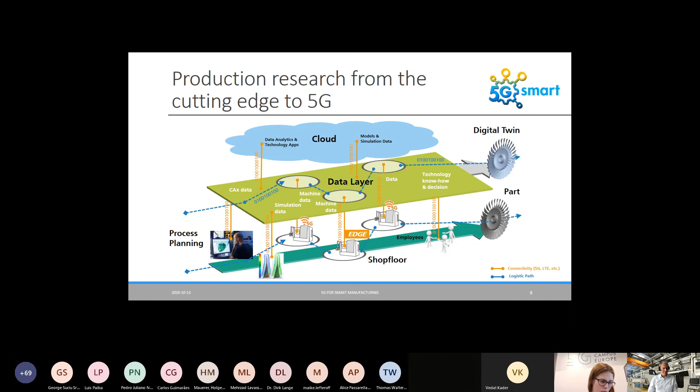So, of course, 5G is attractive because of its unique properties. We know all about these properties already from the many presentations from the press. Of course, we talk about different scenarios. We talk about enhanced mobile broadband communication with high data rates. We talk about ultra reliable and low latency communication with very low latencies and very high reliability. And we talk about massive machine type communication, where you have a high number of devices or high device density.

So with respect to manufacturing, it looks like the most attractive KPI here is ultra reliable and low latency communication, because 5G then outperforms other wireless technologies, especially in terms of reliability, while having also low latency. This is actually the game changer, while 5G is attractive here in manufacturing.

So some example in order to underline the necessity for 5G in manufacturing. This is actually showing results from a study we carried out within the International Center for Networked, Adaptive Production. So we made a factory model, a 3D factory model, where we asked companies from the OT domain how to fill up a shop floor of 10,000 square meter with a number of machines that they envisioned, also partly from their background, very much focusing on machining.

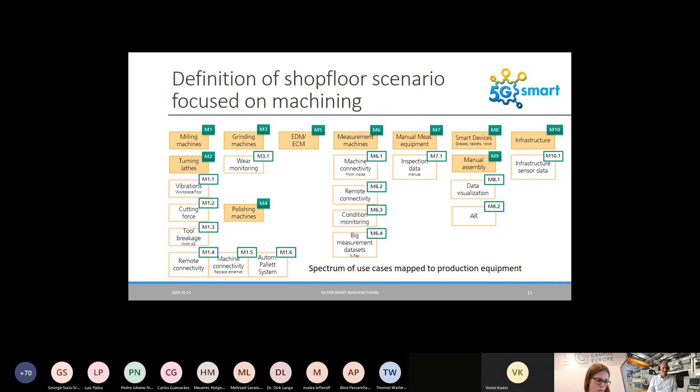For example, vibration monitoring, cutting force monitoring, tool breakage, and so on. Of course, it's clear that all of these use cases cannot be established today because there is no market offer yet. But in case if these devices may be available in future, it's quite interesting to see what is the data profile of this complete production environment enhanced with 5G. That's why we did this kind of mapping.

And this is just one example which kind of use cases are assigned, for example, to milling. You see here milling machine, 5-axis milling machine, and we have an assignment of different 5G use cases, for example, wireless vibration sensors, wireless tool breakage sensors, and so on. And then we have a number of how many of these use cases are actually positioned on the shop floor. So I have to add that in total, this 10,000 square meter shop floor is equipped with more than 90 machine tools. And of course, many of these machine tools, so the companies found it very attractive to have them very well equipped with different kinds of sensors.

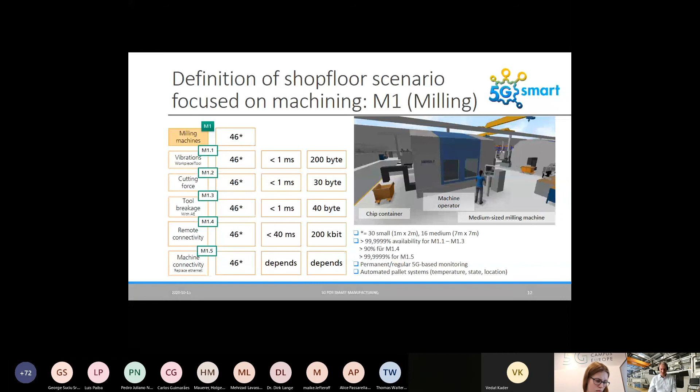And then we had some requirements towards which latency requirements they envisioned. So is it a critical parameter that is being measured here or less critical? And what is the estimation about the packet size, which is being transferred per cycle? And of course, what's the reliability requirement here?

And then we had the overall estimation, and also we could do the positioning of these use cases on the shop floor. In total, more than 900 devices assigned to this shop floor. Here you can only see the use cases that are critical for latency, where we set the latency requirement below 10 milliseconds. From this more than 900 devices, more than 200 were latency critical, which is a bit characteristic for machining, I would say.

And with this data, we can also create different kinds of heat maps. For example, the total number of devices per square, if you want use case density or device density, but we can also calculate the data rates per rectangle and so on.

And this kind of data is, of course, then interesting for the radio planning. What I'd like to state here is that the total data rate coming from these more than 200 5G devices, the many sensors and so on, was more than 600 megabits per second. So assuming that all of these devices are transmitting at the same time, and considering that we have this data rate of more than 600 megabits per second and more than 200 devices begging for latency, it was becoming quite clear that there is a requirement for 5G, because no other wireless technology could fulfill this requirement.

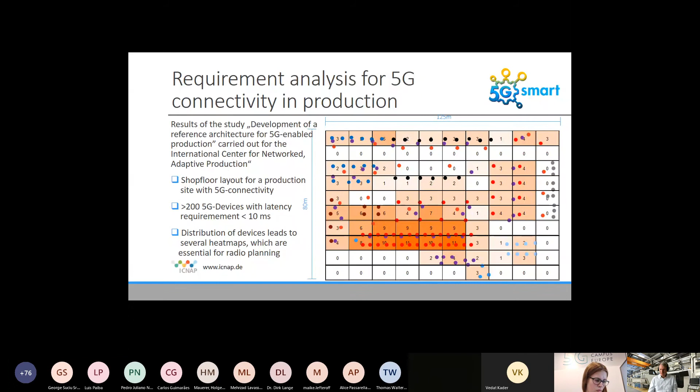Okay, so that was the first presentation, let's say a motivation for the necessity of 5G in manufacturing.

So now I'd like to present the 5G Industry Campus Europe as an innovation platform for the European manufacturing industry. So what is the 5G Industry Campus Europe? It's a very large 5G research infrastructure, a large industrial 5G testbed that we set up here in Aachen.

So the 5G Industry Campus Europe consists of multiple different shop floors. And the shop floors are fully equipped with many machines, machine tools like milling machines, turning machines, and so on, but also robots, and also equipped with logistics equipment like storage, AGVs, and so on. And furthermore, there is an outdoor network of 1 square kilometer that actually surrounds the buildings that contain the shop floors.

And this is set up as a 5G non-standalone architecture. And we have this so-called industry spectrum, 3.7 to 3.8 gigahertz, and we are operating this network in this frequency spectrum. So the national regulator has granted the license for the spectrum here on the campus. This is the campus Melaten of the University of Aachen. And as this is a non-standalone architecture, we also have a 4G network as an anchor band running at 2.3 gigahertz.

So now I'd like to show you a video about a project. Hopefully it's not too loud for you.

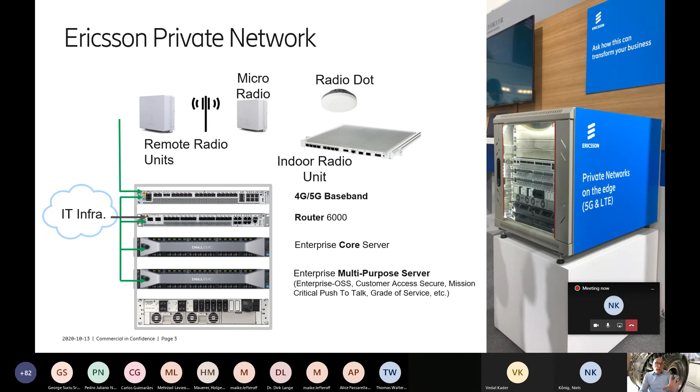The mid band, you probably recall from the LTE days, typically in the 2.6 gigahertz area, 2 times 20 megahertz FDD spectrum has been allocated and is used by most of the operators here, for example, in Germany. 5G is a lot about new spectrum, meaning that the existing spectrum, low band or mid band, could be partly utilized for also 5G NR. But in addition to that, we see quite a bit of new spectrum coming up.

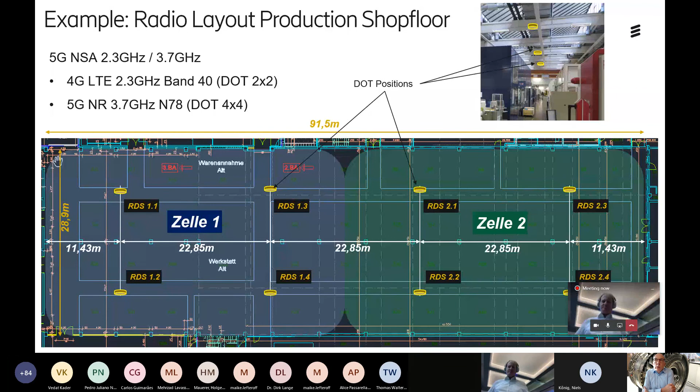It also allows all the indoor users to roam into the outside network. Still, the data then falls out of the network element on their indoor installation. And of course it can visit the neighboring indoor shop floors if wanted. We started with 4 indoor shop floors, done in a way that it can be easily expanded to cover additional indoor networks.

That's what I planned to present: a quick glimpse into how such a shop floor deployment could look like, what we have done so far, why we have done it, and what we have considered in setting this up.

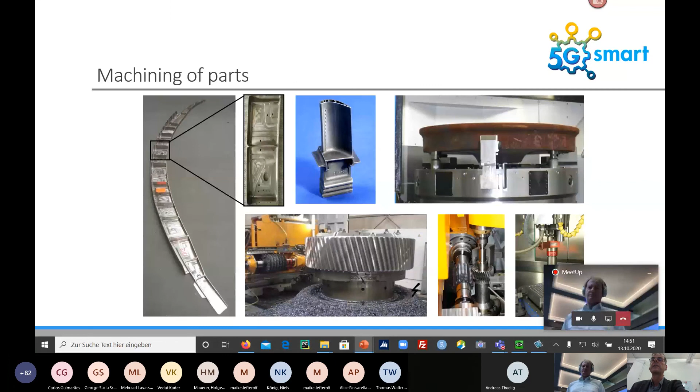One approach, besides other sensors, is to use acoustic emission sensors, a very sensitive quantity. The principle is here on the left hand.

You can see the cutting edge, which could be a grinding wheel, a milling tool, or a turning cutting edge, whatever. If metal material is cut, you get a kind of chip breakage. The chip is cut out of the material, and this produces very high frequency noises. The frequency range can go from the lower kilohertz range up to multiple megahertz, 4 or 5 megahertz, depending on the process, material, machine, damping and filtering. So we have a forming process producing these acoustic emissions.

These acoustic emission waves then run through the material, the workpiece clamping, or the machine table, and then there's a state-of-the-art acquisition using piezo quartz or piezo ceramic to capture this data. Then you have these structural vibrations. You can see here some example signals. It's sometimes very noisy, and it's a challenge to get the right information out of these signals.

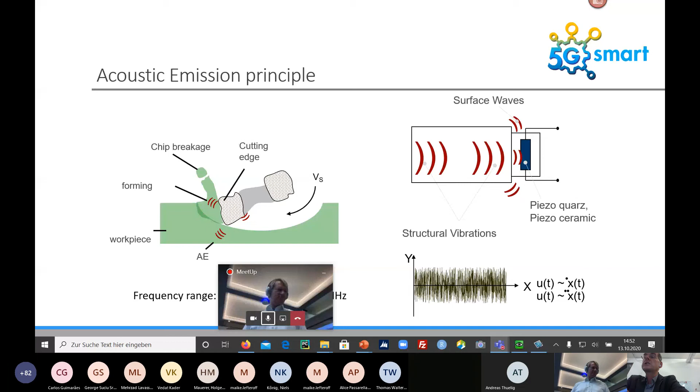The principle is shown here on the left hand: a kind of acoustic emission sensor. The principle is very easy, it's a piezo element. You can find these elements in greeting cards that play music, same principle, just used vice versa.

You have a damping mass, and every wave coming from the cutting process, over the surface, goes through the membrane, through a coupling element, into this piezo. This creates signal changes, loaded with a load amplifier, giving you a very highly sensitive signal. There are different kinds of sensors, for example on the top side, sensors which are mounted by screws.

Other, you have some small inductive coupling, but you can see here the disadvantage because the distance between the sensor element and the emitter or transmitter or receiver is only a few millimeters.

So there is often a need or a problem to install or integrate these sensors. For example, here on the right hand, you can see some grinding applications where the signal flow could be through the grinding wheel, through all the bearings and on the spindle head.

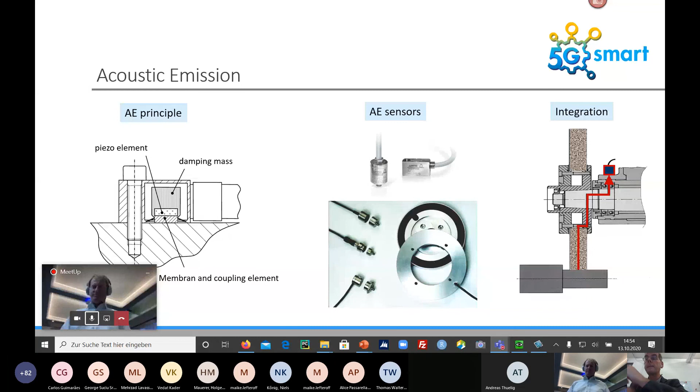And that can cause a lot of problems because you have damping, you have noise from the bearings. So that is only one of a couple of examples why we want to develop some 5G acoustic emission sensors, meaning we have wireless monitoring.

One other application is tool breakage. We have data rates up to 20 gigabit per second if we do not have any pre-calculations, so we produce a very high amount of data. But in this project, it's also a challenge to find or have an idea what is needed for the pre-amplification and pre-calculation.

This can be used, for example, to detect in cost-intensive parts or critical parts like turbine blades or blisks, finding some deviation during the cutting.

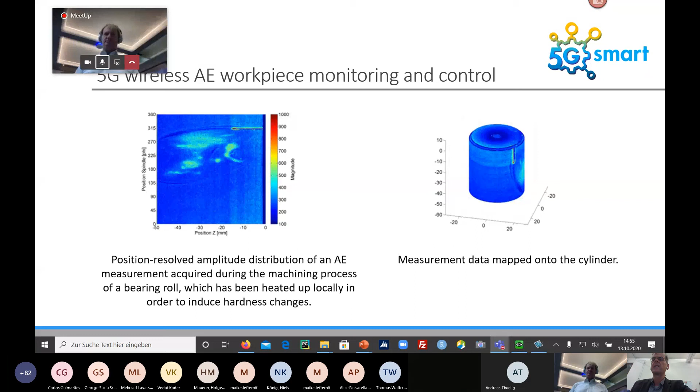So when we look at the use cases, we have, for example, tool breakage detection in metal cutting processes. That means we want to monitor, for example, very small tools in the sub-millimeter range. And if we look at PCB production, there we sometimes have 100 or less than 100 microns diameter.

We have multi-spindle applications, material contact, gap control and grinding. That means we can run at fast speed to the workpiece and then stop when we detect the contact, collision monitoring, or crack detection during grinding.

It also produces some high frequency signals. So as you can see, there is a high need, and it's also a challenge because these acoustic emission sensor signals are very high frequency, including...

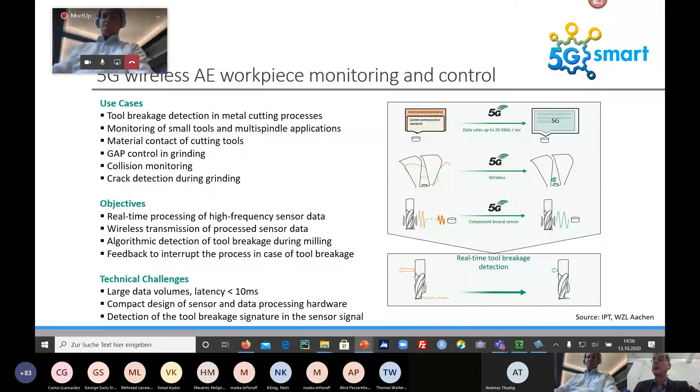What is a typical chain? When we look back, acoustic emission is known for 30 years, and there is a standard measurement chain. We have the high-pass filter, an amplifier, then we cut the upper range and the lower range, and in the end we have some RMS collected, converted with the analog-digital converter, and then provided to Ethernet. This was done in the project.

We used an AE sensor board, developed and connected it as a prototype to the FPGA board, where we are more flexible to find some more algorithms, better filtering, faster filtering.

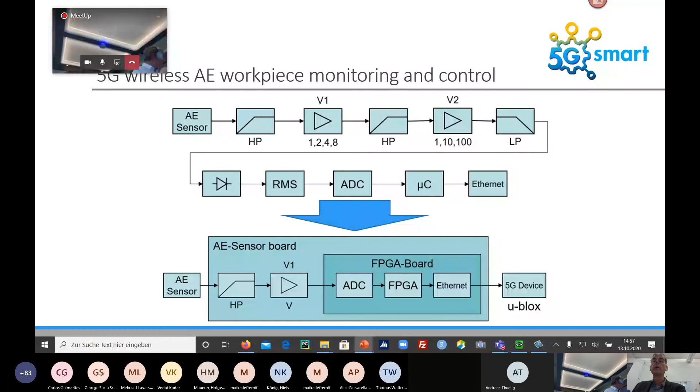So in the project, we connect the AE sensor to the sensor preconditioning module. In the end, it's a complete hardware module with a high-speed analog-digital converter up to megahertz, and we have an FPGA or signal processor.

We have some connectivity interface to get or write out the signals. For sure, we also need some onboard memory.

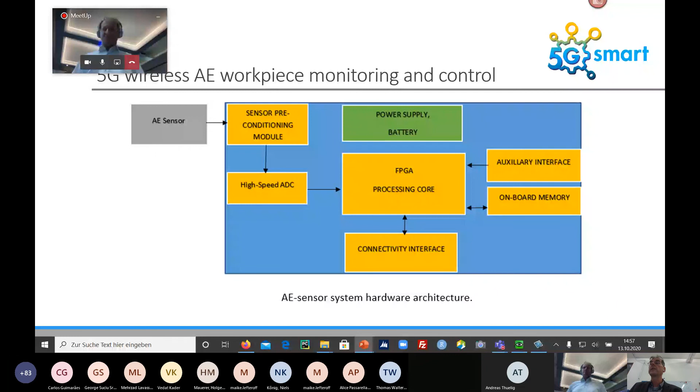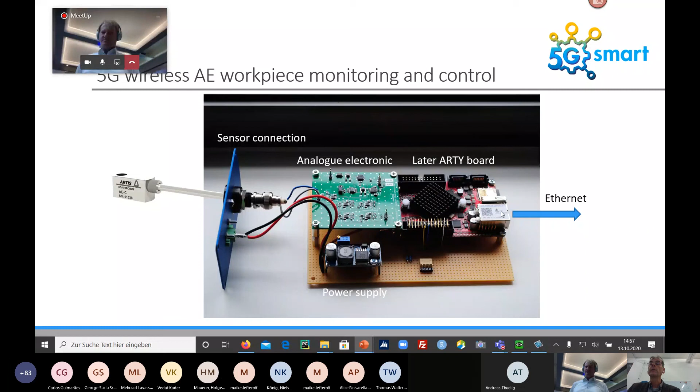So that looks a little bit big, but every big thing starts with a little bit bigger development. We have here on the left hand the acoustic emission sensor, an analog board, and the FPGA board, and we write out the data to the Ethernet.

And in the end, we want to close this loop, using this sensor device as a prototype inside the machine and sending out the measurement data stream. We can configure the data, or configure via data, that is not at such high data rates. For example, we can change the filter, the sampling rates, and run some fast Fourier transformations.

So I think that is a combination, also a bit of the structure for the machine: not only the AE sensor module, we transmit the data to the station of the 5G core, we can have data processing in the cloud, maybe a parallel analysis of the data, and then we want to send back the data via a monitoring unit to the machine where we need the real time.

So we have then later a closed loop if needed via the 5G interface. The other thing is we can save the data within a database or an edge device.

So I think now we can hand over to Niels for your practical demonstration, or?

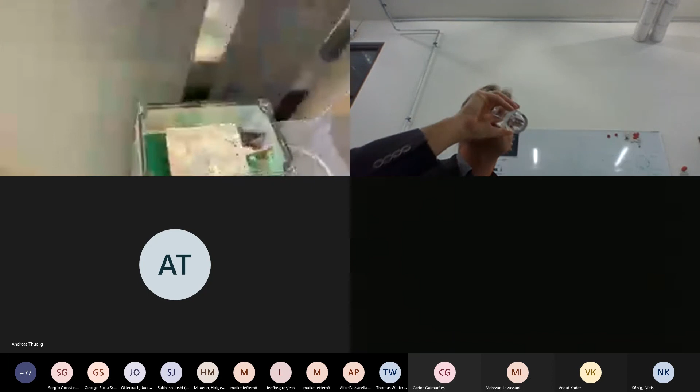Okay, so we have the demonstrator that Dirk was explaining. We have this electronics that you have seen in the photograph, here's a little bit more compact version. So we have some pre-amplification and signal conditioning PCB, and then there is an FPGA board.

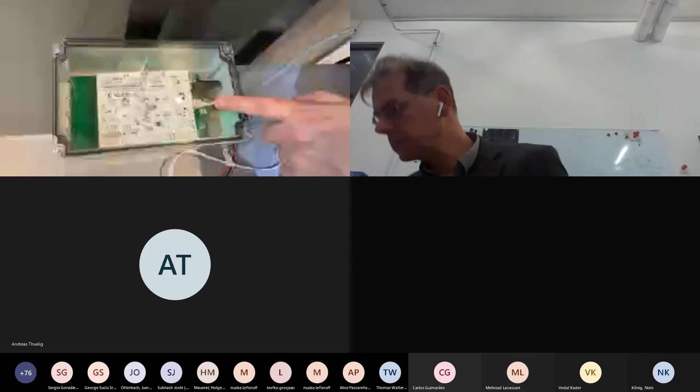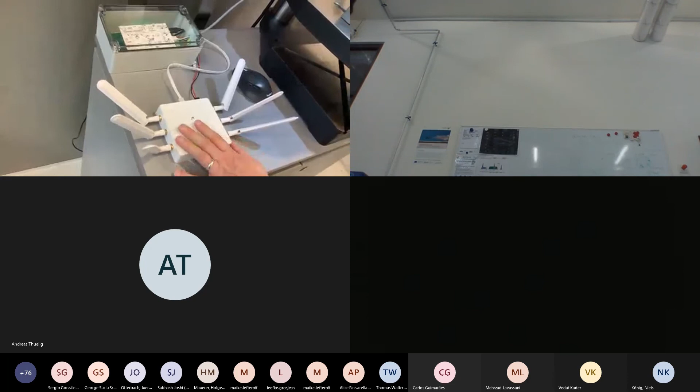The FPGA board then generates the signal spectra. So there's an FFT calculation running at this 1 megahertz signal. And then we have the transmission via Ethernet into an industrial 5G gateway. So from here on, the signal is being transmitted via 5G, of course, then handed into the intranet, so on the shop floor LAN.

And coming back via Ethernet, so there's some cable coming back here, and there's some industrial PC inside this box. This PC is showing actually the result of the signals we are creating here. So here's the piezo sensor attached to the sensor electronics.

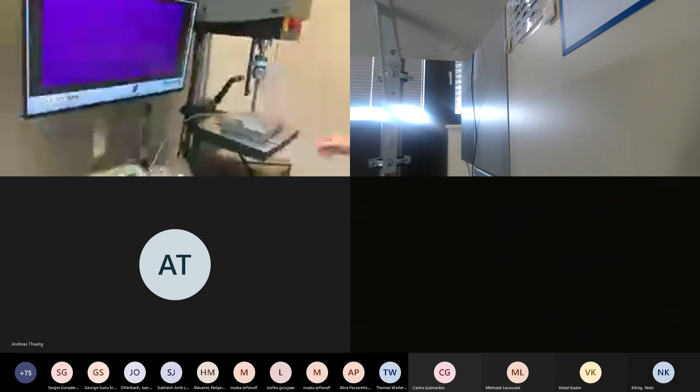And now if we create, now it seems to be... okay. Seems not to work, unfortunately. Okay, I'm sorry. Okay, it worked. It worked an hour ago, actually. So what I would have shown you, it's just a software problem.

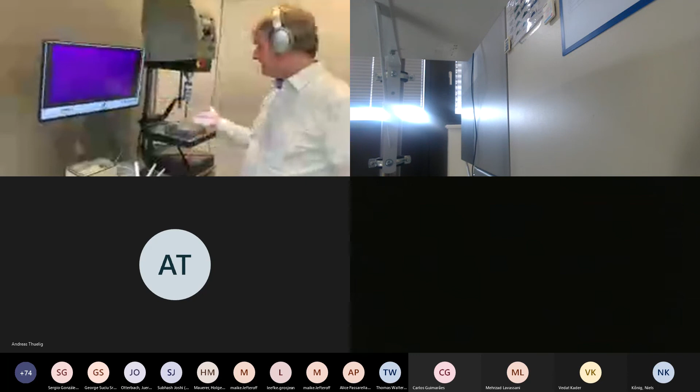Shown you is a waterfall plot where we have on the x-axis time, and then on the y-axis spectra. And you can actually see how the cutting edge carves into the metal and scratches the metal. On the one hand, you can hear it with your ears; on the other hand, of course, we create data coming from this process.

In our case, as soon as a certain amplitude is exceeded, then it interrupts the voltage, just for the sake of the demonstration. That's just an example of how to react to these kinds of critical process conditions. If you wonder about the background noise, that's because we are actually on the shop floor, and all the machines and colleagues are working here.

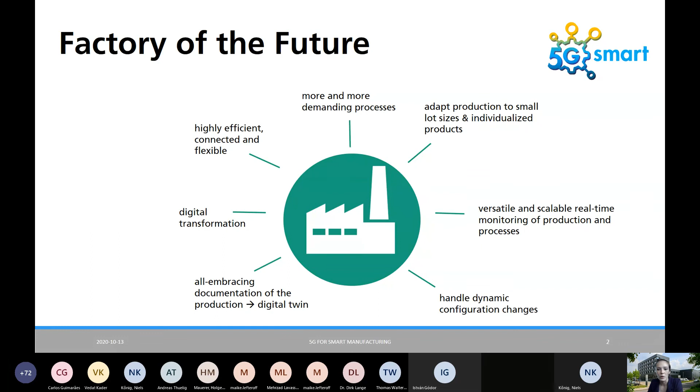And if we want to create something like a digital twin, we need an all-embracing, complete documentation of the production. So all this can only be reached if we go into a digital transformation for industry. That means we need highly efficient, connected, and flexible factories of the future, so a perfect match between sensors, communication, and computation modules.

There are already solutions and technologies in the industrial world that try to make this vision reality, but all of them still have weak points and bottlenecks. For example, many connections are still wired, mostly Ethernet and field bus protocols, and they have limited flexibility, sometimes are even impractical to deploy and have a high cost of deployment.

We also have wireless solutions like WirelessHART, but they need to be more flexible and especially more sensor diverse. Standards like Wi-Fi and Bluetooth don't meet reliability requirements, especially in connection with reproducible latency. And all of those connections are mostly point-to-point, which inhibits flexibility and simple management.

Actual sensors we have are mostly separated standalone systems, so we have additional effort to route data to centralized computation services, and interoperability between machines is restricted. Looking at current multi-sensor platforms, most just focus on a certain application without a very broad spectrum, and have limited real-time capability. Existing infrastructures are mostly unable to support the demanded network density, especially with high interconnectivity between many machines or sensors.

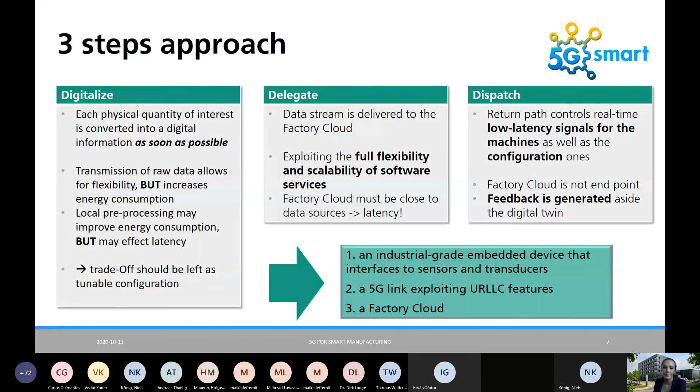The field sensors themselves should be digital transducers or based on digital integrated semiconductors. They have auto-discovery functionality, meaning they can automatically be found by the centralized device management, so you actually know which sensor is at the moment plugged in.

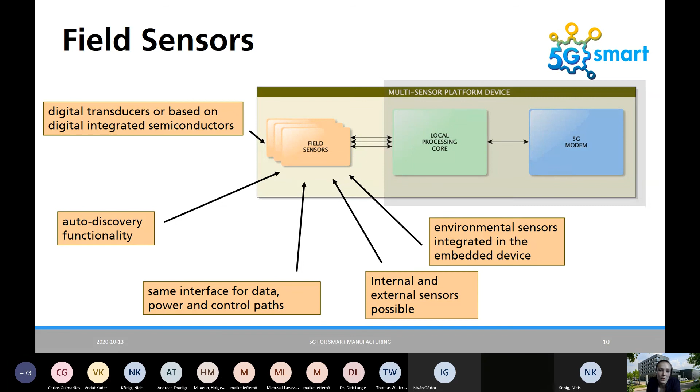At least the environmental sensors should be integrated in the embedded device, but there should also be the option for an external connection in case it's incompatible with electromagnetic propagation. The 5G modem gives us time synchronization, meaning the information stream can be correlated directly during the process.

So as we now saw, we have the embedded device on the shop floor. To complete the whole system and the 3-step approach, we include the 5G link and the factory cloud. The 5G link gives us low latency of a few milliseconds and high reliability, and provides a bidirectional way so that we can stream data up into the factory cloud but also get configuration data back for the sensors.

5G gives us the capability to connect to a large number of devices, for example if we talk about a sensor network on a shop floor. The factory cloud shifts the task from the embedded device towards high-performance processing servers, also due to the energy question, and it is the central coordination point.

Coming to a summary, the multi-sensor platform device combines an embedded device on a shop floor, the 5G link for real-time capability, and local computation capabilities in the form of a factory cloud for flexibility and scalability. It is an adaptable and flexible system in a modular design, so it's customizable for each process. It provides connectivity of different sources and facilitates routing of data to computational services.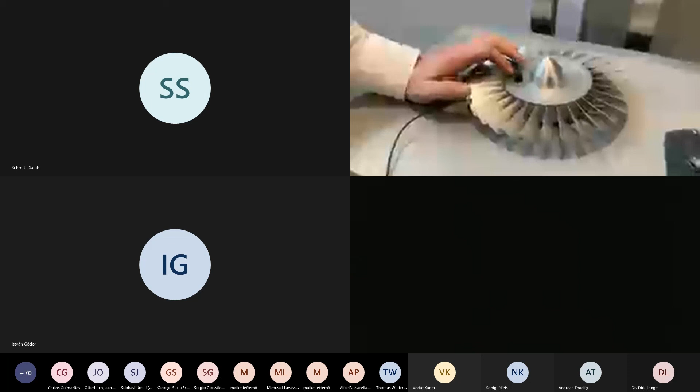Okay, so we have here one example about the 5G multi-sensor platform. This time equipped with an accelerometer, which is actually also a piezo-based element. From the principle, it's comparable to the acoustic emission sensor. This time, the sampling frequency is much lower, so we have a sampling frequency of 20 kilohertz.

And then we have some sensor electronics, so there's also a PCB with an ADC and some preamplification. Then there's a microcontroller attached, and we generate the measurement data as UDP packages, then being transferred to the 5G gateway. There's a bridge in between because our sensor does not understand DHCP. That's a little bit of an ugly thing here, but nevertheless it works.

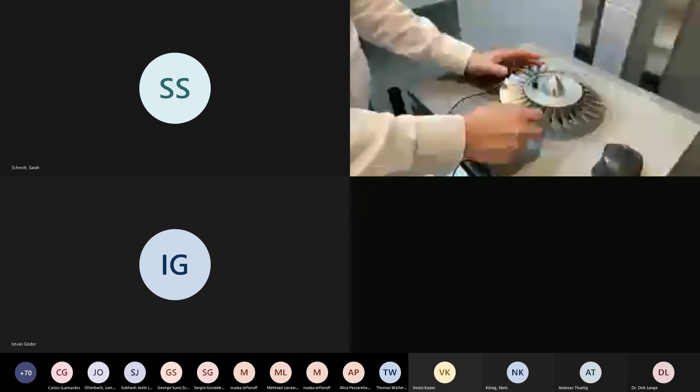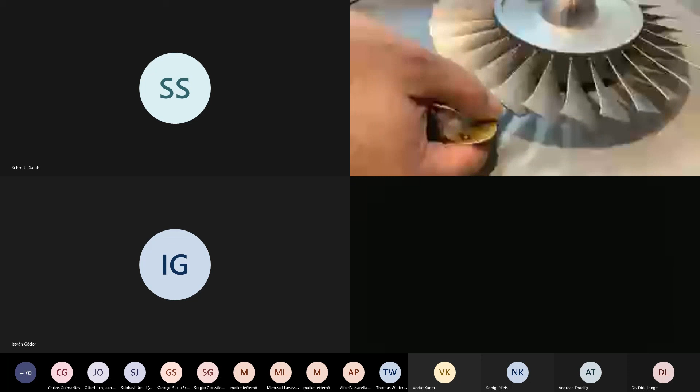And what we do here is actually a monitoring of the vibration of this workpiece. So this kind of workpiece is called BLISK, Blade Integrated Disk, and these are being milled with a 5-axis milling process. As you can see here, we have this couple of blades, which can easily start to vibrate during the milling process because it's very thin-walled.

At the same time, you have a very complex geometry, and of course it's a safety critical part, so you do not want to have any flaws on this part. During the milling and during the vibration of these blades, you may happen to have a vibration mark, which is actually a waviness on the surface. It's just because the blade goes away from the milling tool's cutting edge, and you want to avoid it. You can only avoid it if you know that you have this kind of vibration.

And when you excite these kind of elements, you start to hit some resonance frequencies, and that's what it's about. So you need to detect when you hit, with this milling process, an excitation and resonance frequency.

I'm giving you an example how it actually sounds like if these kind of components are being milled in the milling machine. You have to imagine it's being milled from one piece of titanium, a disc, so it's being milled from one piece of metal. And you can imagine from this geometry, it's quite a complex milling operation and takes like 40 hours to complete this part. This is a small version of this part; typically it's double that size.

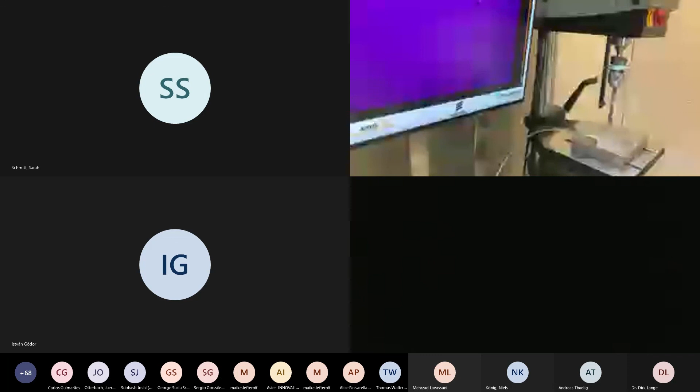And if I increase the pressure, you see in the waterfall plot the cutting edge's contact with the metal. And in the false color, you can see the amplitude actually. On the y-axis, you see the spectrum from 0 to 500 kilohertz.

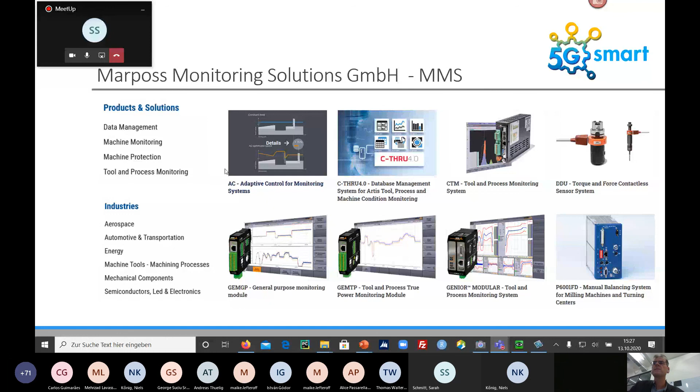So where are the applications for the monitoring? We have a wide range at the machine tool. We look for workpiece and clamping.

That means we have incorrect clamped parts. We have chips in between, so we will have damage eventually in workpieces and tools. We have raw and inhomogeneous material.

Then we have a wide range of cutting tool issues. We have wrong programs, influence by override, manual operations, chip jams, and problems with coolant lubrication.

We have loading and unloading issues, meaning collision and wrong positions. We have problems with the cutting tools, for example, as I explained in my last presentation, broken or missing worn tools.

The machine operator is also a big influence factor. When you look at modern plants, there is one operator dealing with 10, 15 different machines. So there is more need to give him help with sensors, with support systems or intelligence systems.

We look at quality. We want to avoid part verification, where there's a need for process documentation. That's also in the 5G surrounding. We want to grab data from the machine and get it quickly to other machines or to the central server of the plant. So besides condition-based monitoring, there are a big variety of applications for

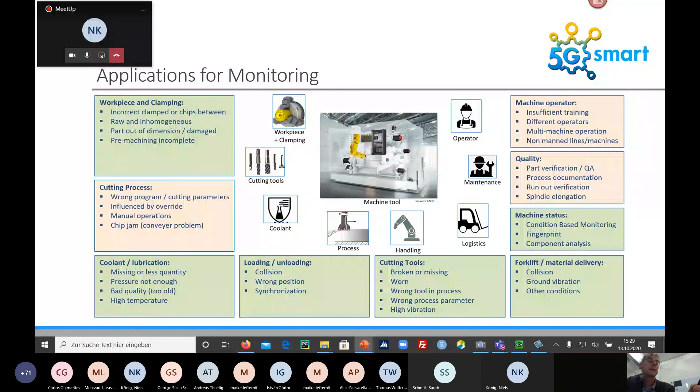That is a picture I showed already in the last presentation. Different parts, big parts. When you see here on the left hand, I can show here.

This is parts in the aircraft industry. It needs sometimes 20 hours to machine, and so there is a need, if something happens, to detect this very early.

The other parts here are turbine blades. This is for the windmill industry, big gears.

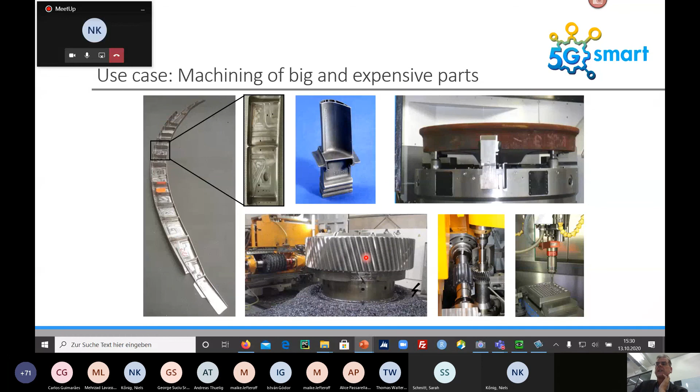So other requirements - the use case machine protection.

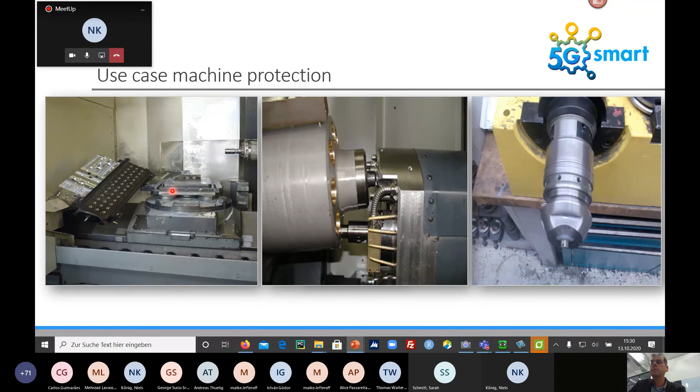with the use of sensors. That is the use case machine protection or collision monitoring. Then we have vibration monitoring, as Niels already showed. We want to detect the vibrations.

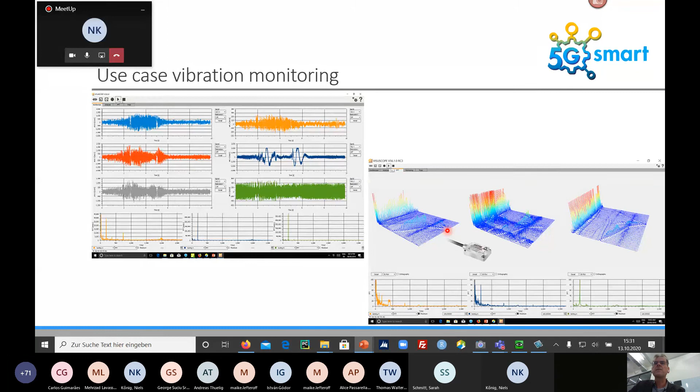Other application, I hope you can see the video, is the adaptive control. That is meaning closing the loop. There we measure, in that case, the spindle power, but the principle is usable also for other quantities like vibrations.

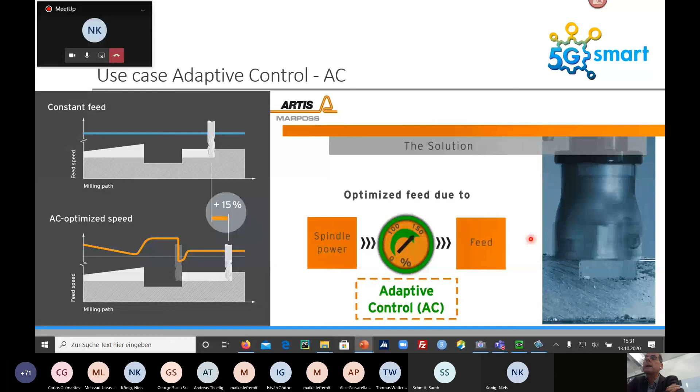I will show later. So the idea is, when I have less load, I can increase the speed in a reasonable range, maybe between 70 and 130% of the override. This is here a milling process.

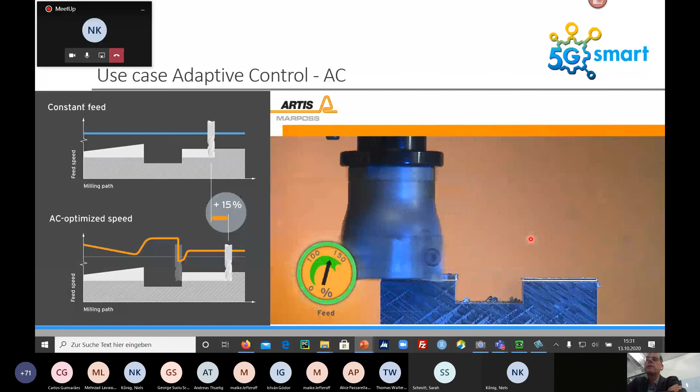The one requirement is to make the process more stable and to run it faster or to prevent tool and workpiece damage.

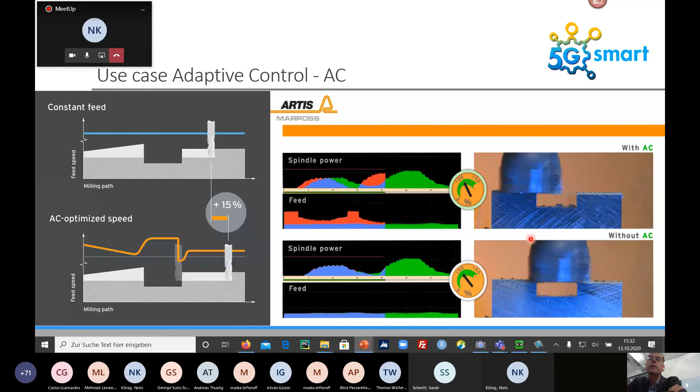When you remember these big parts, machine 20 hours, and then at the end you have a problem with the tool and the total part is scrapped, then you have a very high amount of cost. So that is one approach here with the adaptive control.

So as you can see, you have a lot of advantages, or our aim is to have more advantages in use of 5G.

We have applications we can now deal with standard sensors, but we see more the requirements to have wireless sensors for gap control, for collision monitoring, measurement in very big machines. It's not possible to use cables with 30, 50 meters, or it's a very big effort to make a retrofit on these machines. So it's good to have something easy installed which can send the signals wireless.

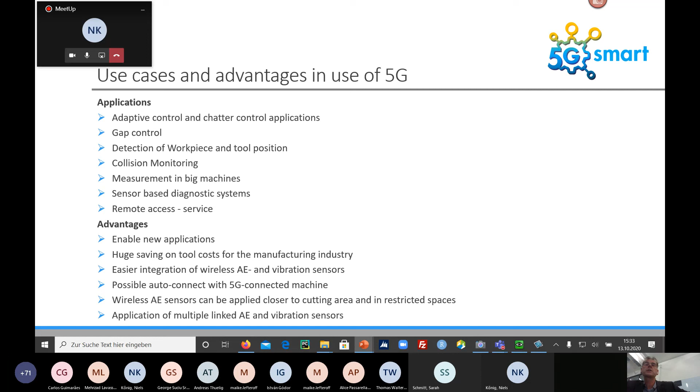Then what we see more and more important, also during this very hard time with COVID, is that we have sensor-based diagnostic systems, or easy remote access, so that we can directly look into the machine, not only to the control, but also to the sensor very deep in. So I see there is a very high potential also to install this system in the easy way.

Here is the state-of-the-art monitoring system. That is our so-called GEM IO Modular. We have some base module connected to the control, meaning this is connected to the machining center.

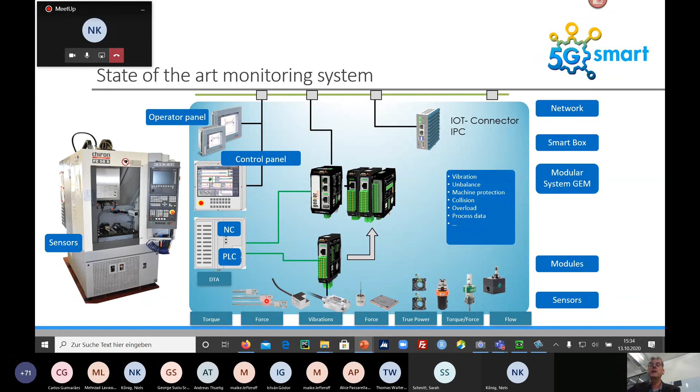On one hand we have sensor modules, and each sensor module can connect to different kinds of sensors. It's not only vibration or acoustic emission sensors we want to connect. We see more and more need for force sensors, because in a lot of machine tools it's very hard to implement these sensors. You can change the workpiece holder, but running a cable through all the machines is a very hard approach.

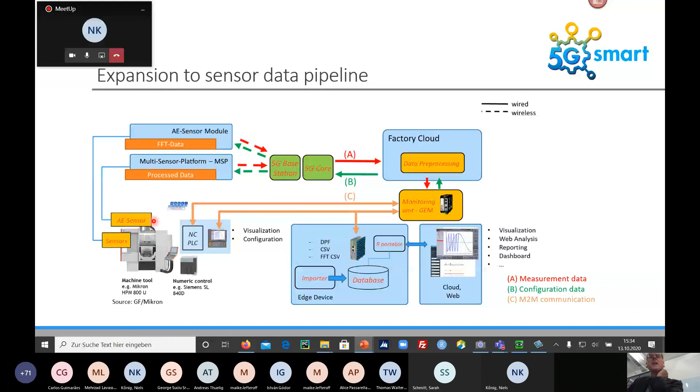Maybe you remember the slide—here is closing the loop. We have the multi-sensor platform or the acoustic emission sensor, and we can feed it back to the machine to have a control loop, not only for monitoring but also for changing. That is the idea here: for example, closed loop with GEM via the 5G network. We haven't reached it yet, but that's what we're working on.

We have this multi-sensor platform, AE sensor module, then an MQTT client, because MQTT goes through the mobile networks. Then we have a 5G base station and an MQTT broker which gives back the signal. That's what we're now challenging ourselves with—to detect how fast we can run this. Maybe it's not always necessary to use wireless, but it makes the cabling easier, and also running the algorithms via 5G.

The idea for this adaptive control, simply put: high signal means lower feed rate. So if I have too high loads on my drill or cutting tool, I reduce the feed. If I have low or no signal, I can increase the feed rate. Different signals can be used—for example true power, torque, acoustic emission, vibration. True power is the known method for adaptive control, but it's not so fast, and in some cases gives unreliable or poor signal.

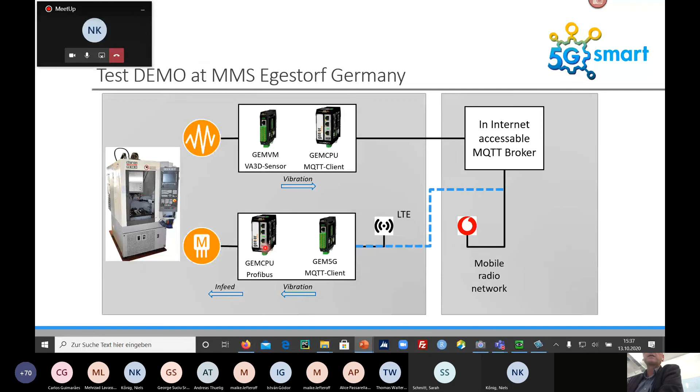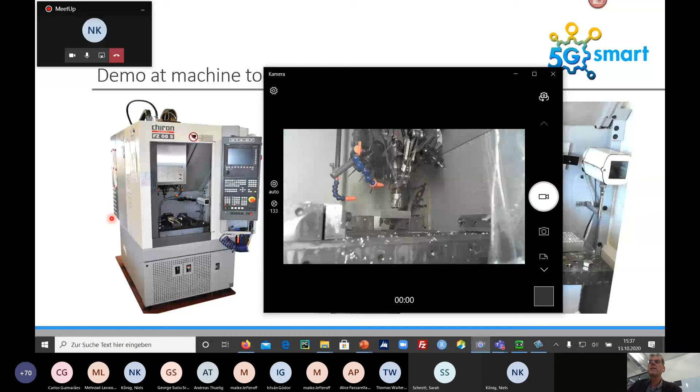This is our machine—I can try to show it. That is a view in the machine. Here in the middle is the milling head, which I will show. This is a laboratory here. We have a milling machine, and there are some other machines, but this is our main one.

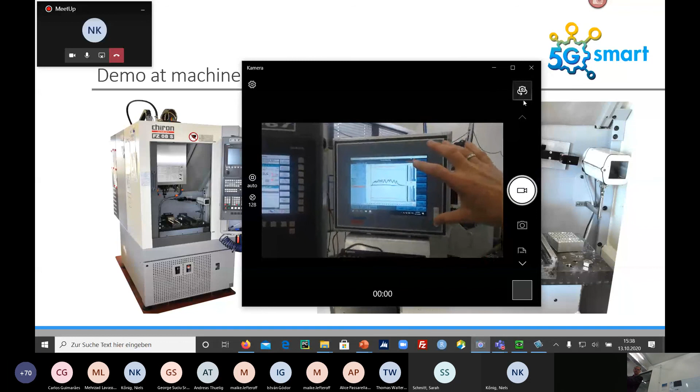As you can see here, here is a control—that's a Siemens 840D. Here is a user interface, a GEM Visu, where we see the signals. And when we go back here, here is an electric cabinet. It looks a bit crowded, but here you can see a module with 5G, or actually 4G, and later we have antennas here. This is a test bench—we have different modules where we connect this. So, hopefully this will run now.

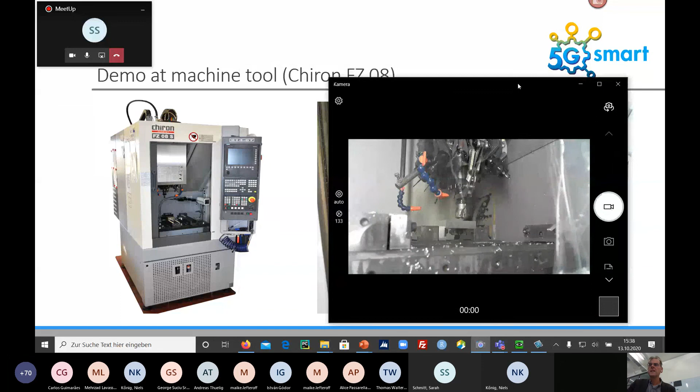Now, I think hopefully you can hear and also see the process on the left hand here. Here is a signal, and you can see the adaptive control. That is the output, and it's now reducing the speed because I have very high vibrations here.

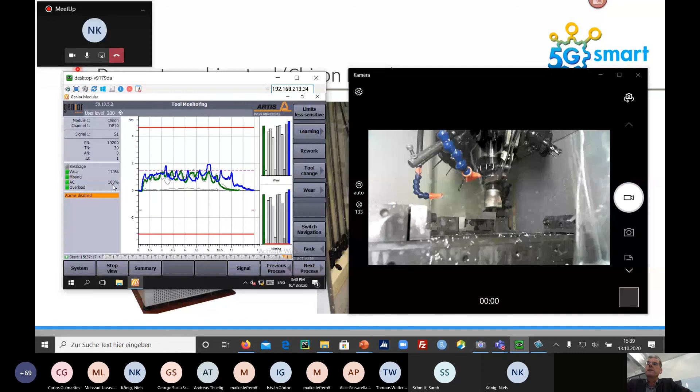Here you can see it changing between 70 and 130. Honestly, we must say the adaptive controller is not optimized—I think that's the next step we have to work on. It's a very simple milling operation here; this is not optimized from the NC programming, but it's for demonstration.

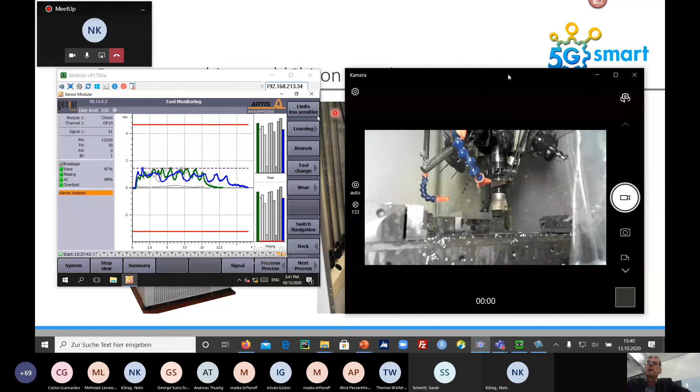What you can see here now is very interesting. Now it's at the end of the program. In the last process, maybe you saw there was not so much cutting, and the controller was working at about 130% of the nominal or program speed. That means I saved a lot of time during this cutting—that's the economical benefit. If you have an optimized NC program for mass production, normally that's already optimized in itself. But if you have long-time cuttings, for forming or over hours, then it's a big advantage.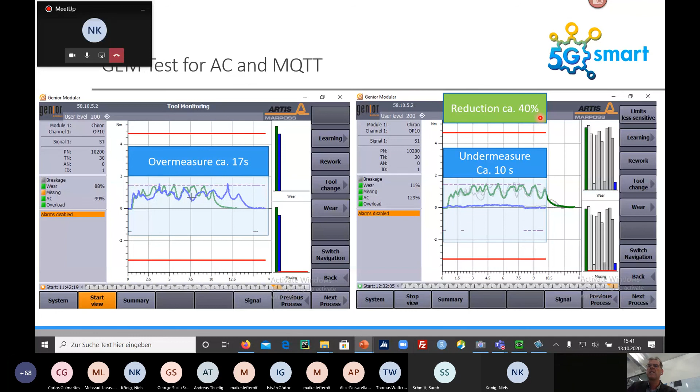Normally, if you use adaptive control systems, you have optimizations of 5 to 10%. So in conclusion, the adaptive control and chatter control application.

As you can see here, we have easy adaptation of diagnostic systems. We have easy remote access via 5G with gap control, detection of workpiece and tool position. That is another use case we often hear from our customers. They don't know exactly where the workpiece is, and they want to easily mount some sensors on and then get the contact between the tool and the part.

Then measurement in big machines. So you can see we have a lot of advantages to use this new technology.

And what for us was interesting, even when this control closed loop was not working through the 5G because of network connection problems, since we are in a very rural area here, even if we use the internet to imagine we send the signals from Egestorf to Hanover and get the signals back via MQTT, it was possible to set up a closed loop.

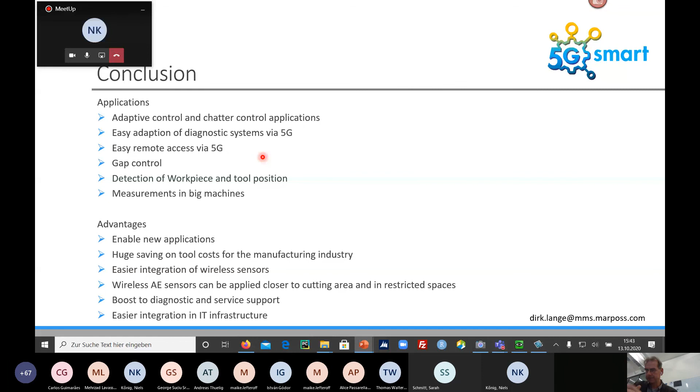And so we think with 5G we will have really more opportunities. So with this, thank you very much. And if you have some questions, please tell me.